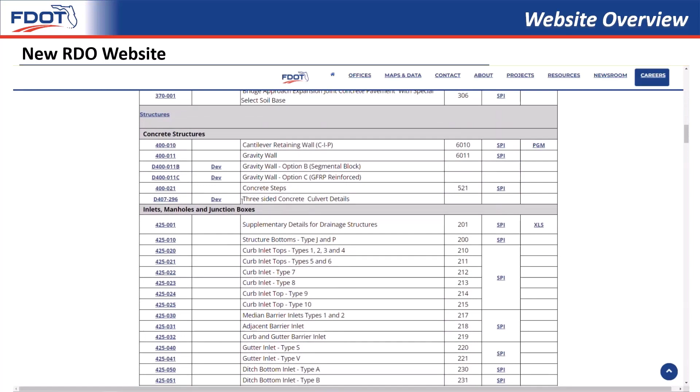Okay, here is our new book. We did not add any new indexes this cycle, but we did make a number of revisions. This page looks the same as previous years, so it should not be any different for experienced users.

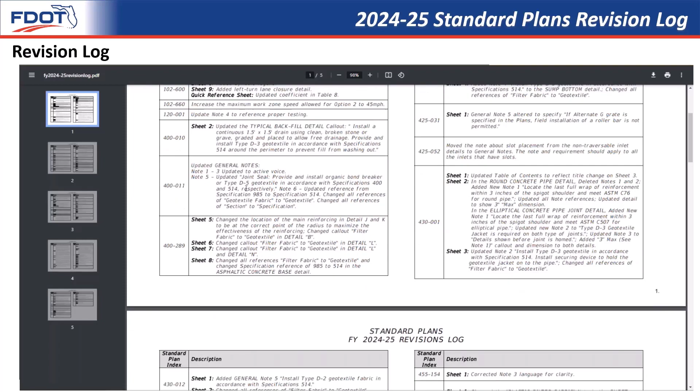Let's take a quick look at the revision log. This shows all the changes that were listed on the Track to Status page, but with a sheet-by-sheet description. To me, this is the best place to look and see if a revision was made to an index during the cycle.

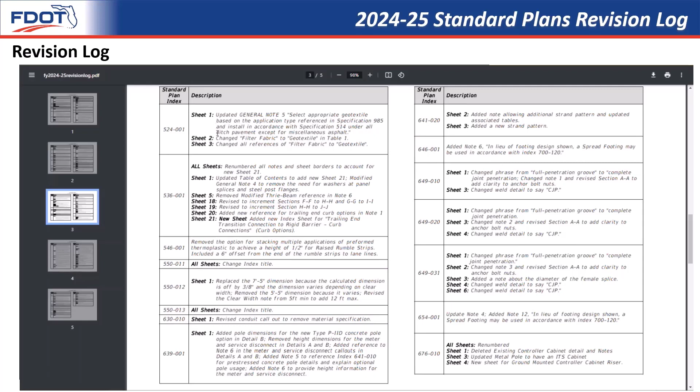My favorite revision to the website is the staff directory. We have a direct link here that takes you to a page with the standard plan section staff. I'd like to quickly go over our standard plan staff with you.

As I mentioned before, I am the state standard plans engineer. My former position is the standard plans publication engineer. That position is currently vacant and advertised on our website.

Richard Stepp is our senior standard plans engineer. Richard is a statewide expert on lighting issues. He also covers fencing and all of our roadside safety topics, including roadside barriers.

Richard has been a big help to me with working through a vacant standard plans publication engineer position and the additional work it requires.

James McGinnis is a standard plans engineer in our group. He is responsible for temporary traffic control and recently has taken over as our office's expert for roundabouts and other alternative intersections.

Shay Gibbs is the newest member to our group. Her title is Standard Plan Specialist, and she helps with the publication process, quality control for all of the revisions to the book, and is responsible for the development of our new submittal and review process. She has been a great addition to our group.

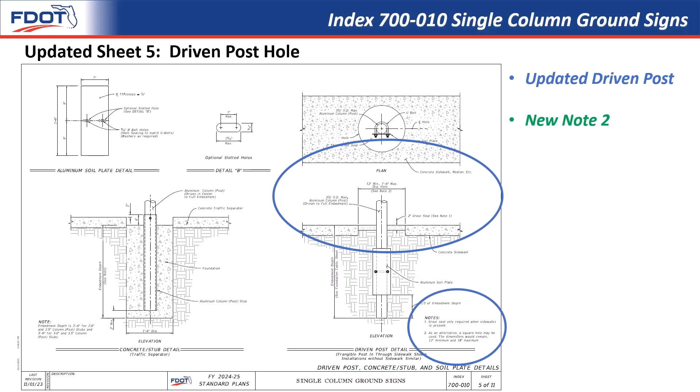This is something that the districts have requested me to add for a while now. There are times when the standard foundation shown in the indexes isn't practical because of limited space available. In those cases, the engineers were required to do a site-specific design to allow for a foundation that didn't impact the surroundings, for example, underground utilities.

So we worked with some of the districts, Josh Turley in our structures office, and staff at the Traffic Engineering Research Lab, or TERL, to come up with an option that we could add to the standard plans. This option should only be used when called for in the plans in cases of need.

One note I would like to make clear is that the base location can be shifted on the spread footing. We know that this location does need to vary to help avoid conflicts. The only limitation is it must be at least 1 3/8 inches from the edge of the footing.

Notes were added to the standard plan indexes 646-001, aluminum post and pedestal mounted pedestrian detector and signals, and to 654-001, rectangular rapid flashing beacon assembly, to allow for the use of this spread footing design in those applications.

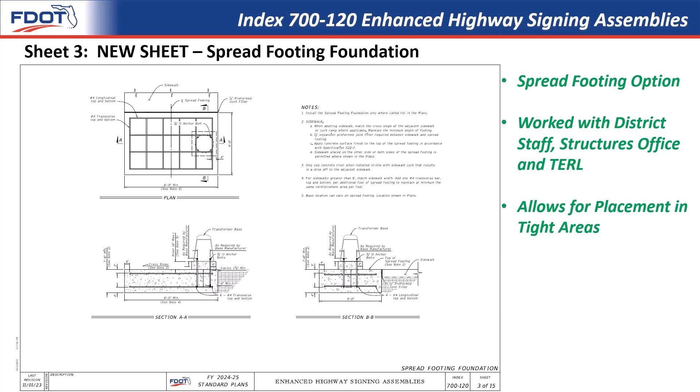Next, in the same index, I want to spotlight 3 new enhanced sign assemblies that were added. Durwood Shepherd has been working with other offices as part of the Railroad Safety Task Team to come up with ideas to help make railroad crossings safer. One item we came up with that is fairly simple is taking these 3 sign assemblies and enhancing them.

The first one, shown here on sheet 12 of 15 in Index 700-120, takes the railroad crossing warning sign and adds the flashing beacon to the top to make the sign more visible.

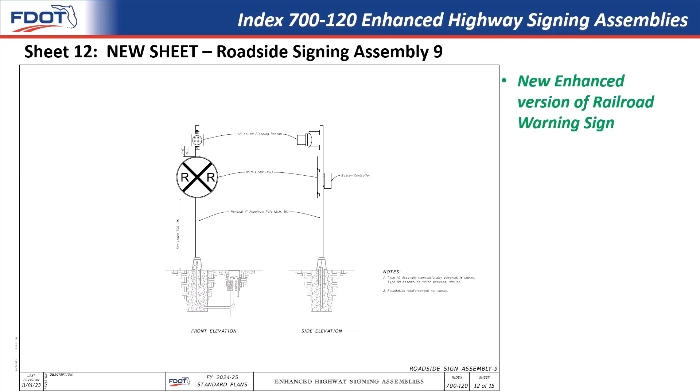Here on sheet 14 of Standard Plans Index 700-120, roadside sign assembly 11 is the last new enhanced assembly added this cycle. It is basically just the standard railroad crossing sign assembly with either a stop sign or yield sign depending on the crossing. But with this assembly, the stop or yield sign will be highlighted to make it more visible and hopefully help make approaching vehicles aware of the upcoming railroad crossing.

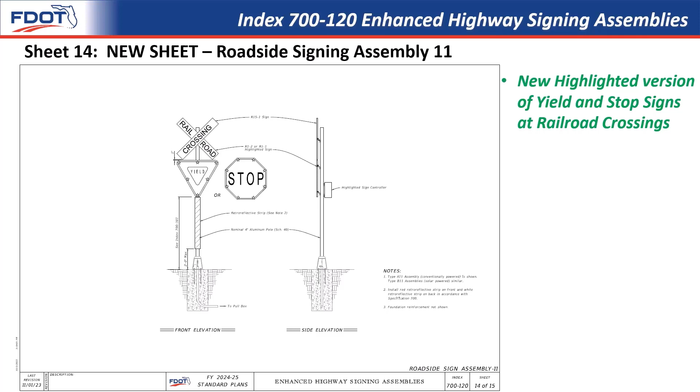After further coordination with the Traffic Engineering and Operations Office, the 18-inch white diagonal pavement markings along the mainline shoulder approaching the gore on entrance ramps are being deleted, as they are not shown or required in the AASHTO Green Book.

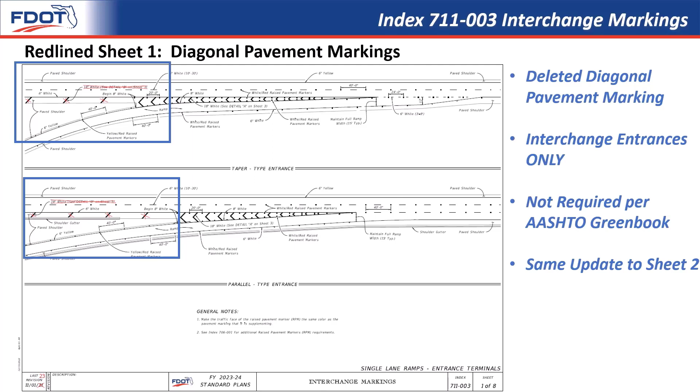Therefore, we deleted the 18-inch white diagonal pavement markings and label along the main line shoulder approaching the gore in both the taper type entrance and the parallel type entrance. We made this revision to all entrance details, including the details on sheet 2. They will remain on exit ramps. We are only deleting from the entrance ramps.

Here you can see the updated sheet 1 with the 18-inch diagonal pavement markings deleted.

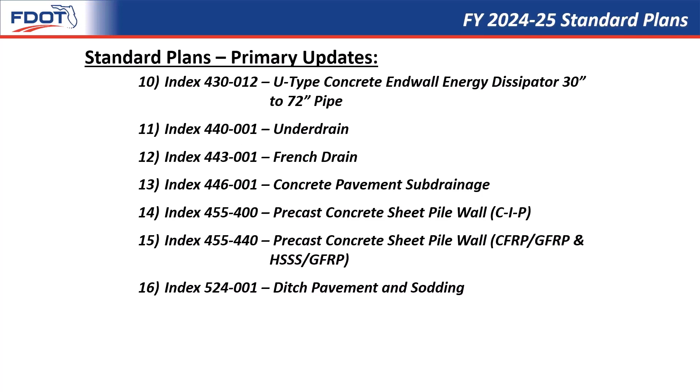In the July 2022 SSRBC workbook, construction requirements for the contractor for geosynthetic materials from Specification 985 were removed, due to construction requirements not belonging in Division 3 of the specifications, as that division is designated for producer requirements.

Instead of applying specific requirements to each individual specification that references 985 in Division 2, Specification 514 has been modified to cover geosynthetics used for drainage applications, construction requirements, and material acceptance.

Specification 514 does not cover reinforcement applications and erosion control, which has specific requirements in various areas of Division 2. It also ensures the contractor obtains geosynthetic product from a manufacturer that meets Specification 985 requirements. To be clear, Specification 514 essentially does reference Specification 985 to meet the materials requirement. However, Specification 985 covers manufacturer and producer requirements, and Specification 514 has now been modified to cover contractor requirements.

I will now show a selection of these indexes to give an idea of this update.

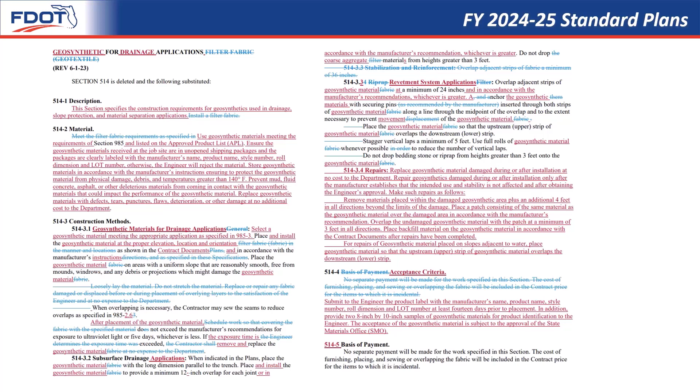This next one is similar. This is Index 425001, Sheet 3, which covers supplementary details for drainage structures. On this index, you can see we've updated a callout in the title to say geotextile instead of filter fabric. We've also added a note to clarify the type of geotextile.

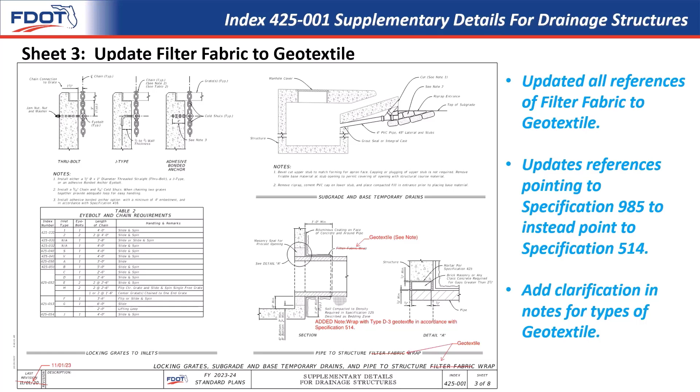Index 430012 now has a note on Sheet 1 to specify which geotextile to use, and references Specification 514 for the requirements.

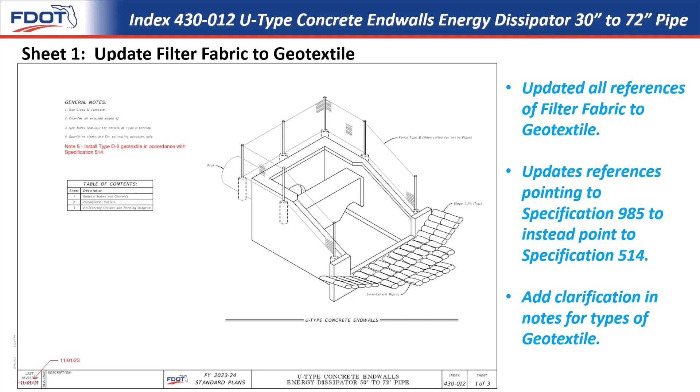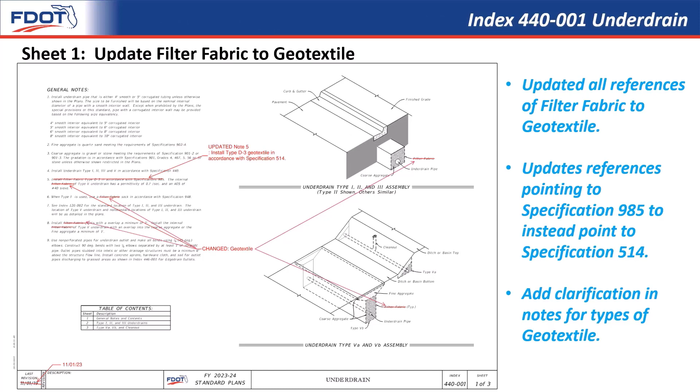My last example is Index 440001 for underdrain. Same as before, the notes and callouts have been updated to the new wording and specification.

The next updates are to Index 676010, Cabinet Installation Details, and 700-101, Typical Sections for Placement of Single and Multi-Column Signs.

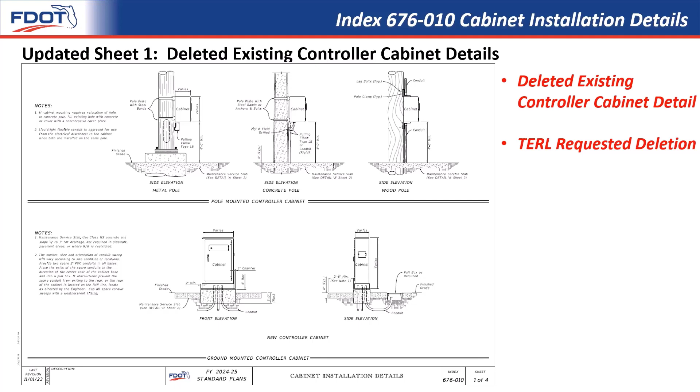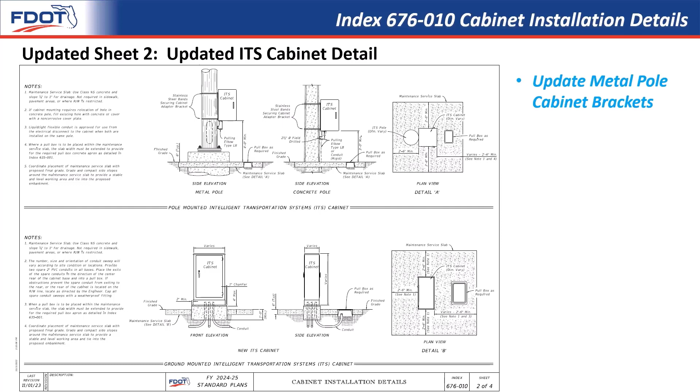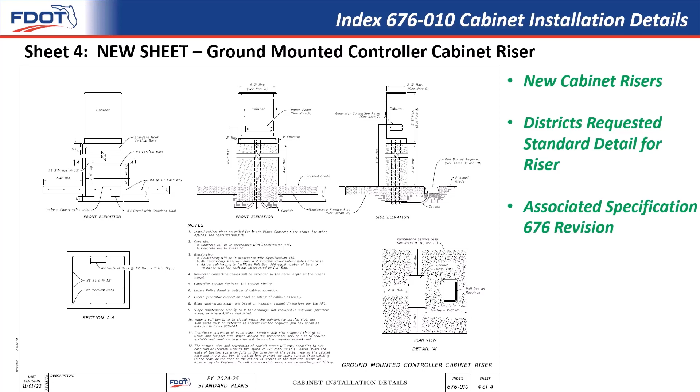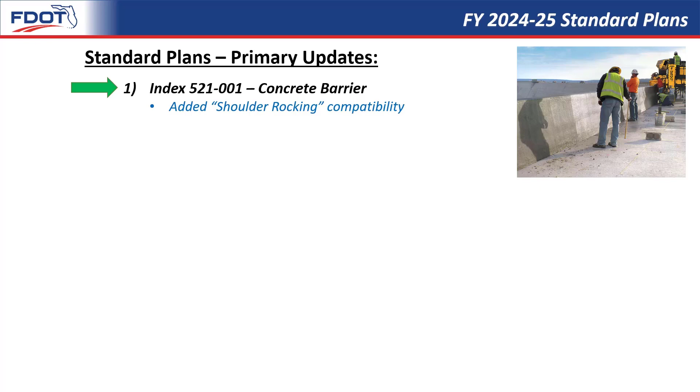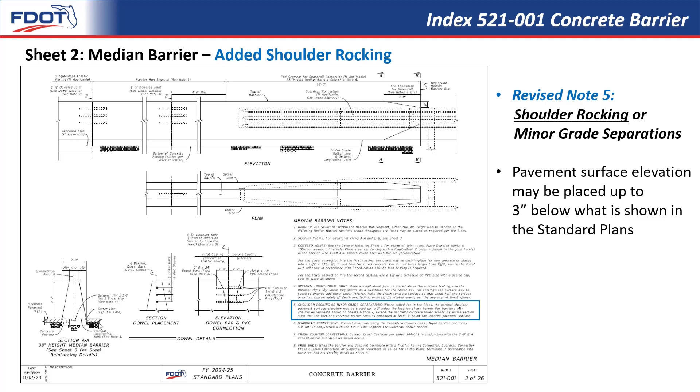You can see that the shoulder pavement's called out as this hatched area on both sides of the barrier, and the gutter line intersects the barrier at its bottom corner. That's basically the default setup from the standard.

And now this detail here is the blown up version of that, showing what's permitted when shoulder rocking is used. You can see that it's okay to lower this pavement up to 3 inches below the default gutter line.

In general, shoulder rocking is used as a last resort when the vertical profile of a roadway is very, very flat. So in order to get the water to drain longitudinally, the shoulder pavement basically will vary up and down every 100 feet, and the drainage inlets will be placed at the low points.

This new policy was recently added to FDM 211.4.2.1. If you go in there and follow the profile requirements called for, it basically leads to the result that the pavement gets lowered about 3 inches. Allowing for this 3 inches of lowering in our standard plans will accommodate that.

Additionally, for the plan's content requirement regarding shoulder rocking, you could look to FDM 915.3.5.1, with further details given in the standard plans instructions for 521-001 Part J. That just basically shows you how to place the callouts in your plan view along the gutter line of the barrier. If you were to start off by looking at the SPI for 521-001, that would get you going in the right direction.

Moving on, next up we have index 536-001 for guardrail, where here we've added a brand new sheet 21 for bridge trailing and transitions to rigid barrier. This now provides designers and contractors with some new curb options. In addition, we've revised the required washer usage, and we have some new exclusions.

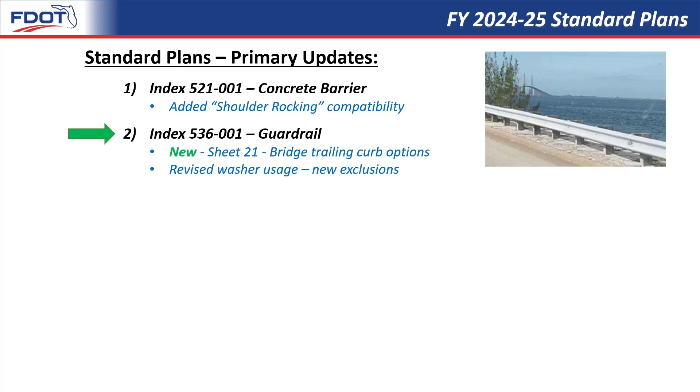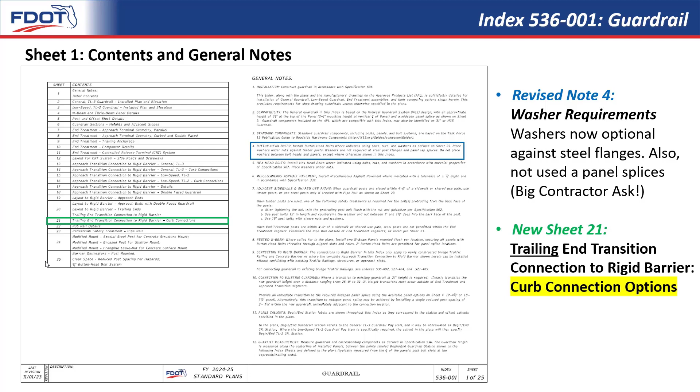Looking at the trailing end transition connection to a rigid barrier, typically a bridge, we previously only showed a very basic guardrail connection with no curb connection at the ground level. The curb connection isn't required for crash worthiness the way it is on the approach end. That said, several designers requested curb drawings for water conveyance and compatibility with curved roads, so we created a brand new sheet 21 and added this reference into note 1 shown below.

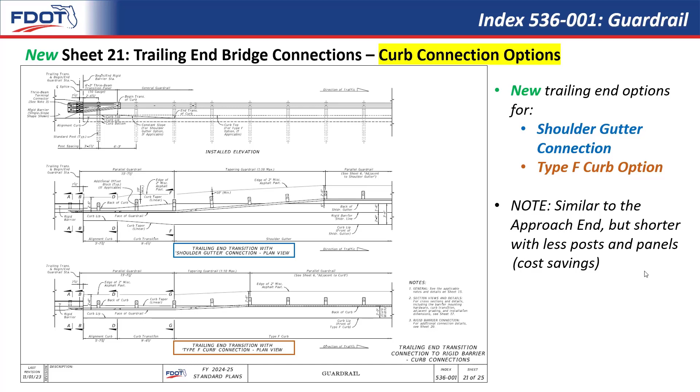As an example, to help explain these plan views, we'll look at the shoulder gutter. Here we've got the elevation on top, and we'll focus on the plan view on the bottom, specific to the shoulder gutter. In the blue rectangle, we've got the parallel guardrail section, where the face of guardrail aligns with the rigid barrier. By parallel, we mean it follows the edge line of the traffic lane. That parallel section includes the alignment curb, and the section views for that are on sheet 17, just like the approach.

This also includes the curb transition, shown on sheet 17 between sections DD and FF. Coming off the bridge, by section FF, the shoulder gutter shape is basically established. With that shoulder gutter established, we then have the tapering guardrail, transitioning out at 1 to 10, with the goal to get to the next parallel guardrail section, fully detailed on the right. At this point, you just have your guardrail typical section for shoulder gutter, defined on sheet 6 of the standard plans.

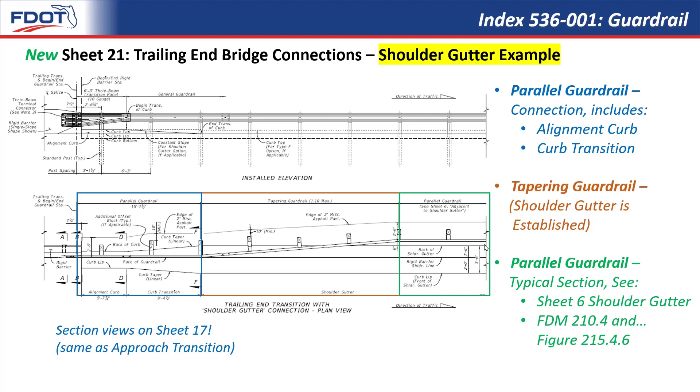It's also shown in FDM 210.4 and figure 215.4.6. This aligns with the shoulder gutter shape shown in the standard plans, where the rigid barrier shoulder line travels parallel to the road the entire way and lines up with the gutter. You project that out, following the edge line of the roadway. You then have 2 feet to the curb lip, the front of the shoulder gutter, and 1'6" to the back of the shoulder gutter. The face of the guardrail is then 6 inches behind that. That's your typical section that can continue for miles or however long you need it.

So now, given this new tool, what are the needs from the roadway designer? What needs to go in the roadway plan view? As shown in the blue rectangle, you call out the trailing end transition station so it aligns with the standard plans. The pay item for this is currently 536-8-113, called trailing transition, and per the specifications, it includes that alignment curb.

You then use your guardrail line and draw the guardrail coming off of this concrete barrier. You place that guardrail line at the face of the guardrail, emulating what's shown in the standard plans. We've got the dimension for the parallel guardrail, then you taper the guardrail at 1 to 10, roughly 4 post spacings. Then you've got your guardrail typical section established, corresponding to this parallel guardrail section. Last, you call out the shoulder gutter limits, and you can tabulate that with its own pay item.

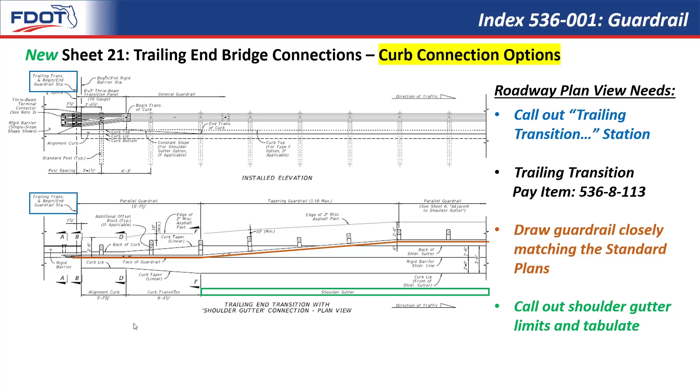I'll also remind you this is just the shoulder gutter version. The Type F curb version is very similar, even a little simpler with a shorter taper, and you handle it in the same way. So the hope here is now on the trailing end, you require even less detail in the plans, and hopefully this helps moving forward.

And with that, we can shift gears and move forward to Index 639-001 for the electrical service point details. Here we've added a new taller concrete service pole option and also fine-tuned some other things.

Taking a look at Sheet 1, Detail B for the underground feed, we can see this new 16-foot service pole option. This was requested by District 6 down in Miami-Dade County, and that 16-foot pre-stressed concrete pole was recently added to Index 641-010, Sheet 5.

The options to differentiate the poles are shown here. We've got Type P2A, the 12-foot version, and Type P2D, the new 16-foot version, with corresponding above and below ground dimensions given. We also added cross-reference linkage between this index number and the pre-stressed concrete pole standard it uses, Index 641-010, shown in Note 5.

Next, we removed some vertical dimensions from this detail to give more leeway and freedom for the districts, and added Note 6 to explain these device heights. This basically explains that the meter and service pole disconnect heights are defined by the EOR in the plans or by the power company.

This typically follows the NEC National Electrical Code, but you can see the minimum height of those devices is 4 feet. Beyond that, the electrical engineer working with the power company can define these other heights. Particularly for the new 16-foot pole, the engineer may choose to make these two devices higher.

Last, more leeway is provided so the meter can be placed below the service disconnect if needed. That's our last change. It applies to both Detail A for aerial feed and Detail B for underground feed, and Note 6 is referenced for both of these devices.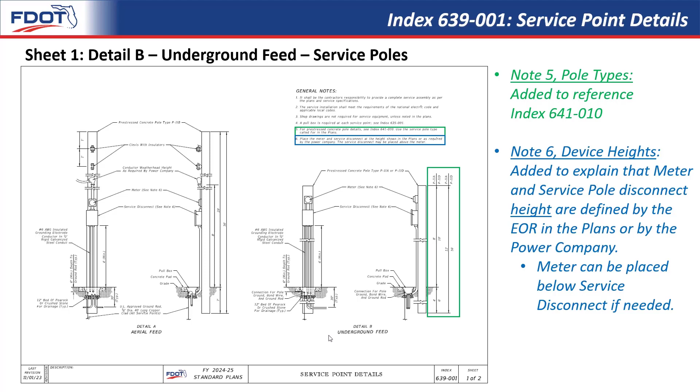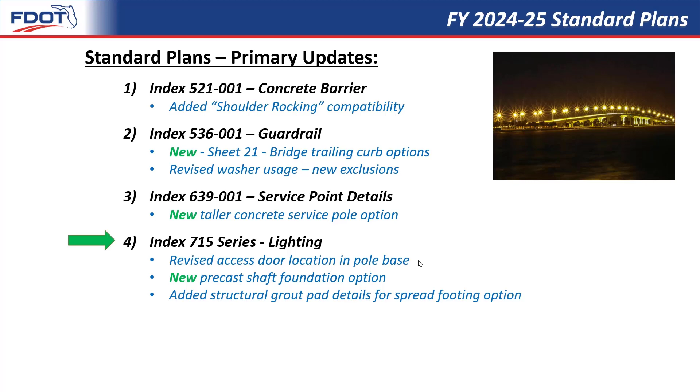And so with that, we've wrapped up the service point details. We can now move on to the Index 715 series for lighting. We've revised the access door location in the pole base, added a new precast shaft foundation option, and added some structural grout pad details for the spread footing option.

Here we'll take a look at Index 715-001 for conventional lighting. On Sheet 1, we've updated the access door orientation. First, we removed the access door detail from the metal pole wiring detail down here.

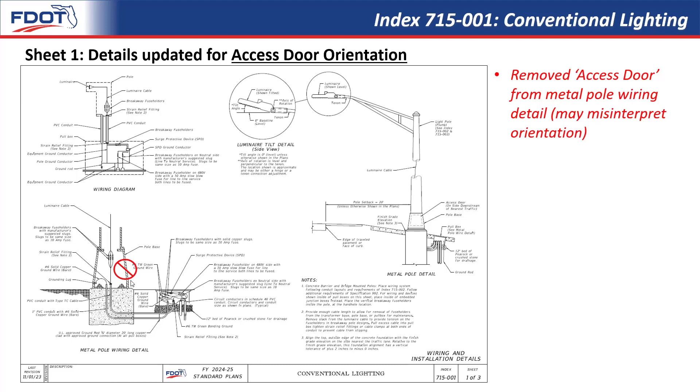The issue is this detail didn't establish a clear orientation, so some might have misinterpreted that location. With that detail removed, we went ahead and labeled the pole base, which references the pole base callout in the metal pole detail. Now the metal pole detail has the orientation clearly established.

We can see the light pole arm here, which faces the roadway. So now when we draw on the access door, we know that it's oriented perpendicular to this arm. The goal is that the access door is now located on the side downstream nearest the traffic. That's the requirement, and with the orientation clearly established, this matches the standard specifications 715-3.

The reason the access door is located on the trailing end relative to traffic is so workers can keep an eye on oncoming traffic when working inside the access door. This helps give workers a little extra heads up in case there's an errant vehicle departing the roadway, so they may have some time to get out of the way.

Now moving on to Index 715-002 for standard aluminum lighting, we're taking a look at Sheet 4 foundation details where a new option has been added. Note 3, shown in the green rectangle, is brand new.

It's basically a new option for precast foundations, which allows for these foundations to be cast a little more easily in the shop. This was requested by the fabricator and it helps them out.

Quoting directly from Note 3: for precast foundations, the circular cross-section shown here may be substituted with an octagon shape. Here's the circular cross-section shown in view BB. Instead of that circle, they can use an octagon so they have some flat surfaces in their forms. Continuing the quote, the out-to-out distance between parallel edges of the octagon must be greater than or equal to 2 foot 6 inches.

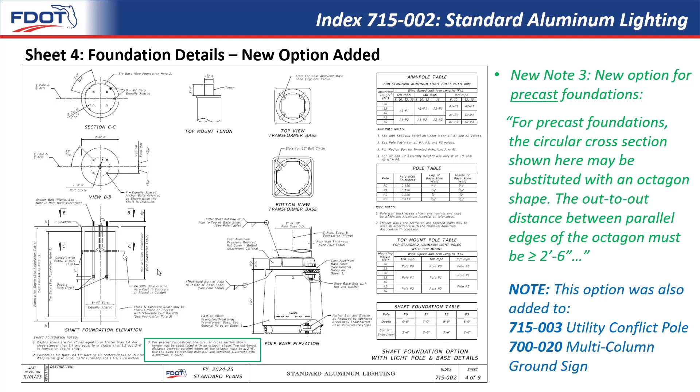Okay, so now taking a look at our last topic in the standard aluminum lighting standard, we'll look at Sheet 5 for the spread footing foundation option. The spread footing in general is a recent add, and so we got some feedback on this regarding constructability and adding some more details to help.

This new structural grout pad shown here in green does assist with that constructability by allowing for leveling the area directly beneath the pole. Basically, in a lot of cases, the spread footing foundation is designed to emulate the sidewalk with the same cross slope, and so the cast surface of the top of it may not be perfectly level. The simplest method is to cast this foundation essentially even, matching that concrete cross slope all the way across, and that really helps to avoid any surface irregularities.

And then from there, they go ahead and place the structural grout pad and make sure that thing is nice and level. This new detail basically supplements the specification 715-3.1 process that was already in place, and it already provided grout as an option for leveling that surface. That said, placing it in the drawing certainly does help to guide the contractor, so this should be helpful. And one last thing, that grout material is defined in specification 934. All of these things are mentioned in note 9 here down below.

And then next, just mentioning a minor change to note number 7. We are continually investigating costs and how to improve practicality, and so we've revised the sizes of washers required to anchor the pole. We're just making sure that these large washers that are called for are readily available in the industry.

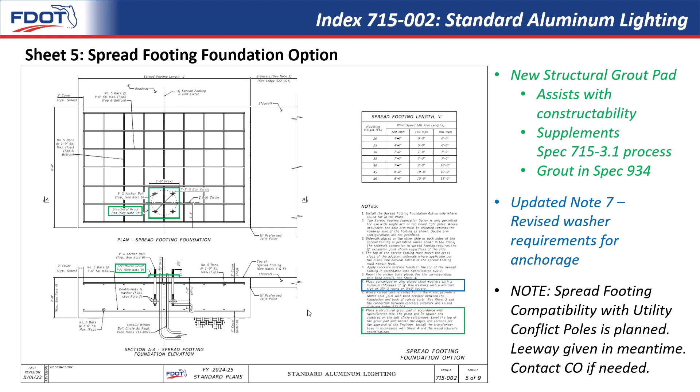Okay, so as we close out our revisions to the concrete barrier and lighting standards, this seemed a good opportunity to make a training announcement. Working with us here at FDOT, the Florida LTAP Center is hard at work producing some major trainings for some of the larger items in roadway design.

So the first of these is FDOT roadside barrier design. As you can see by the title, it's not a national training, it's focused on the way we do things here at FDOT. This training is estimated to be 12 hours long, broken up into several modules, and it really will be the most organized and comprehensive training ever developed for FDOT on this topic.

So the training will start off with FDM 215, roadside safety, and it will cover the usage needs, length of need, and general requirements, among other things. It will then go over the details and requirements for the standard plans for guardrail, concrete barrier, pier protection barrier, and even the connecting crash cushions.

The next major training in development by the Florida LTAP Center is the FDOT Basic Lighting Design Training. This training is estimated to be 9 hours, broken up into several modules, and it's expected to be the most organized and thorough ever produced for FDOT on this topic.

The training will start off by covering FDM 231 for lighting, including usage needs, warranting, photometric design, voltage drop design, and the lighting design analysis report contents, among other things. The training will also cover the standard Plan 715 series, including conventional lighting and high mast lighting.

Both trainings are in development, so no course dates have been announced. That said, both are expected for the first half of 2024. These are expected to be given as live interactive trainings one time, and then the recording of those trainings will be posted on the Florida LTAP website for anyone to view at any time.

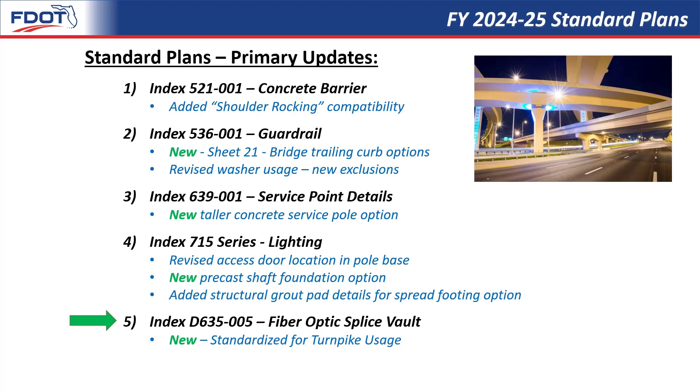Last but not least, we'll take a look at our brand new developmental standard plans, D635-005, for our fiber optic splice vault. This whole standard was created to support the Florida Turnpike Enterprise and their fiber optic network, although it certainly may be used elsewhere.

These vaults are typically placed in medians to facilitate fiber optic access points and connections. Standardization of this option removes the need for project-specific structural designs and shop drawings, which should save a lot of time and effort moving forward.

In order to create this standard for the Florida Turnpike Enterprise, we had reviewed project-specific design packages that were pretty lengthy. So the idea is by developing these clear details and notes to specifically explain what's needed, we should be able to avoid a lot of that work going forward.

Something worth mentioning is the Structures Design Office specifically took a look at the concrete and steel reinforcing design of this structure and designed it for the H20 loading, which is a substantial size truck, so we can be confident that whatever large moving equipment is used on the roadsides can be accommodated with this design.

One other interesting enhancement is that this new design now uses the Type 3 manhole frame per Index 425-001, so this consistency of standard designs and matching what's currently used on many roadways should help to bring costs down.

That said, the manhole cover is basically the same as the one used in 425-001, except it's not a two-piece cover, it's just a single-piece cover, so the material is continuous without any joints. That added weight requiring lifting should add a little bit of extra security for that fiber optic system.

Looking ahead, the plan is to publish this standard with the regular standard plans for the following standard plans ebook cycle. But for now, we wanted to give this a trial run as a developmental standard because that makes things a little bit easier to modify on our end. We're following feedback on constructability closely, and we can make updates as needed.

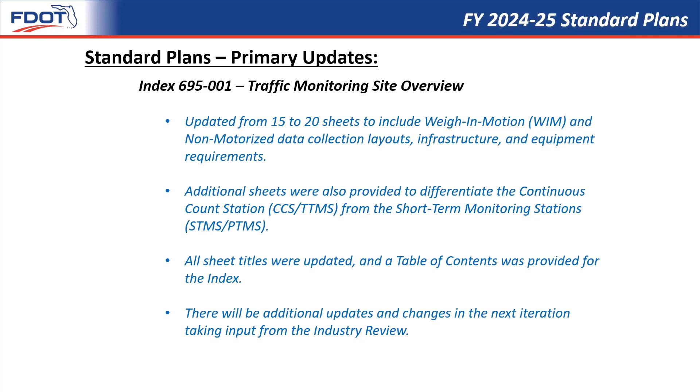Sheet 1's illustration was updated to show the required modem antenna, managed field Ethernet switch, and patch panel. Details were moved to sheet 18 and replaced by the table of contents. Corrections were also made to the notes section. Note 1D was corrected for an error with the P1 receptacles identification. Note 5 was amended to be consistent with the other sheets. Notes 4 and 6 were modified, removing the statement of furnished separately for required equipment. Here's the new sheet 1.

Sheet 2's amendment was to add the required modem antenna, managed field Ethernet switch, and patch panel to the illustration. Changed from vehicle terminal strip to a more accurate piezo sensor terminal strip. Correction to the notes: 1D properly labels the P1 equipment cable. Notes 4 and 6 remove the furnished separately notation for required equipment. Note 5 was amended to be consistent with the other sheets. Here is the amended sheet 2.

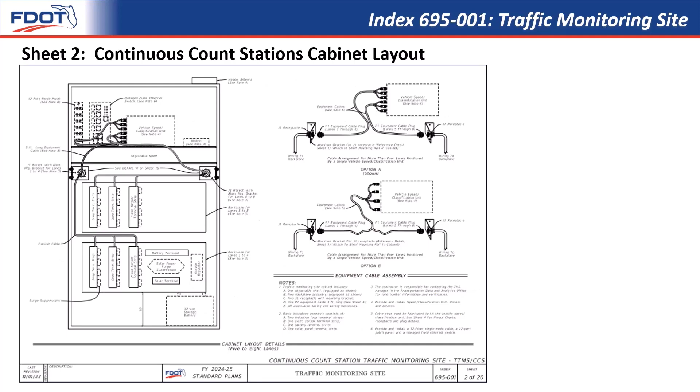Sheet 3's illustration was modified to spell out the center conductor notation. Here's the modified sheet 3.

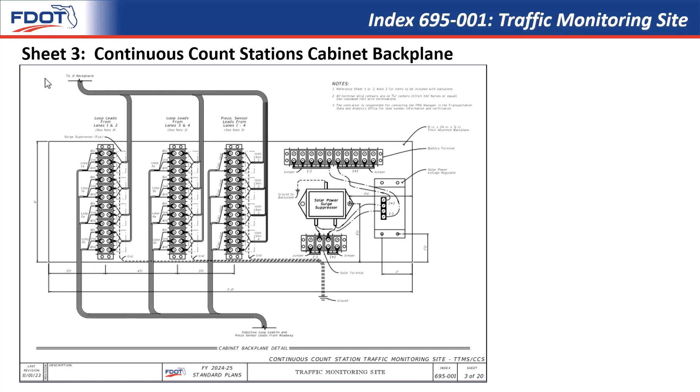Sheet 4 was updated to correct the second table, the P1 equipment cable plug pinout, that was previously incorrectly labeled as J1. The modified sheet 4.

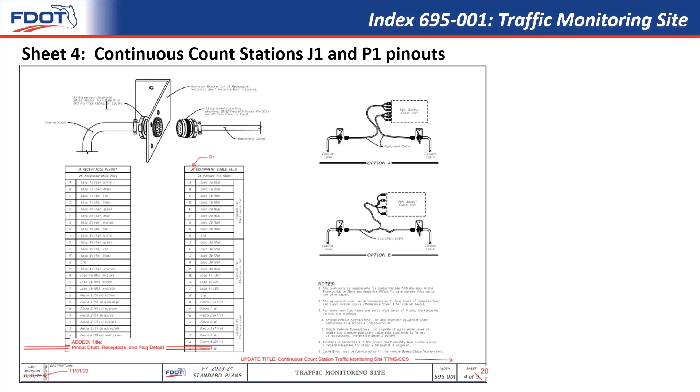Sheet 5 was updated to show in both layouts both lanes of travel flow. It specifies a non-weight axle sensor for the configuration. It moves the curb and gutter detail to page 18. It updates Note 3 for the removal of splicing the loops from the document. Loops must now run the entire distance to the cabinet. Note 6 was also deleted. Here's the modified sheet 5.

Sheet 6 is a new sheet for the short-term traffic monitoring layout, 4 or less lanes. No modem or antenna will be required for this setup. Here is the new sheet 6.

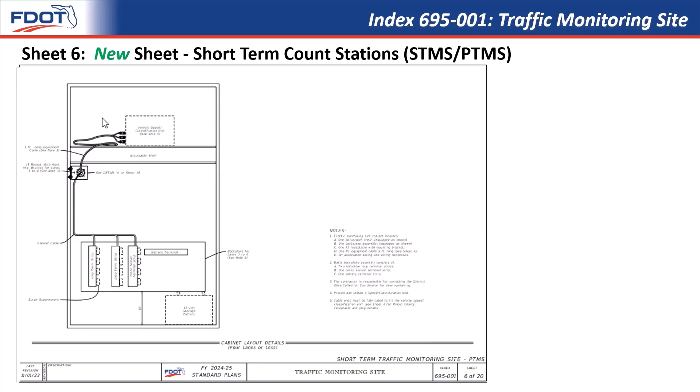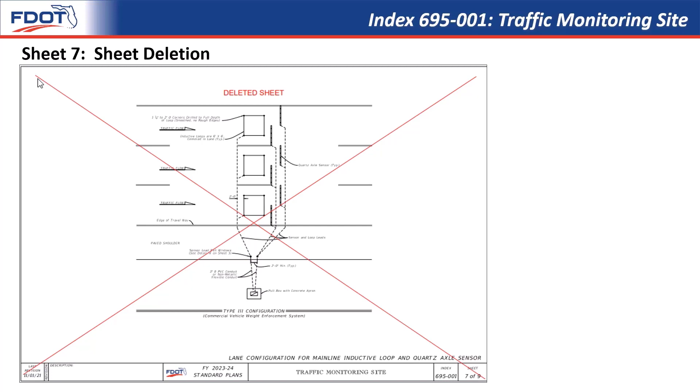Sheet 7 was deleted from the 695-001 as FDOT TDA is moving closer to the long-term pavement performance, LTPP, standard for weigh-in-motion sites. The new sheet 7 is to illustrate the short-term traffic monitoring site layouts for 5 to 8 lanes, omitting the need for the managed field Ethernet switch, modem, antenna, and patch panel.

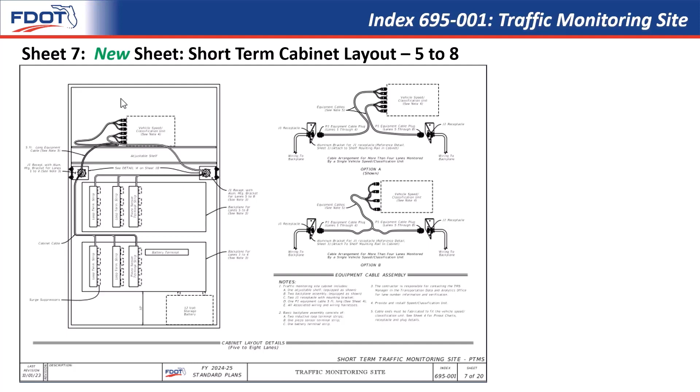Sheet 8 is a new sheet to illustrate the lane layout of the short-term data collection locations, up to 4 lanes. Here is the new sheet 8.

Sheet 9 is a new sheet dedicated to the weigh-in-motion monitoring site cabinet layout. Sheet 9's illustration includes modem antenna, managed field Ethernet switch, and patch panel.

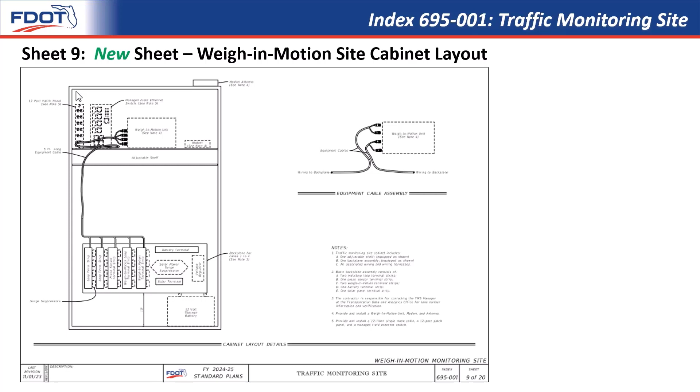Sheet 10 is a new sheet for the weigh-in-motion cabinet backplane details. The new sheet 10 illustrates the weigh-in-motion backplane details. It includes inductive loop terminals, non-weight and weight sensor terminals, along with solar power suppression and regulator.

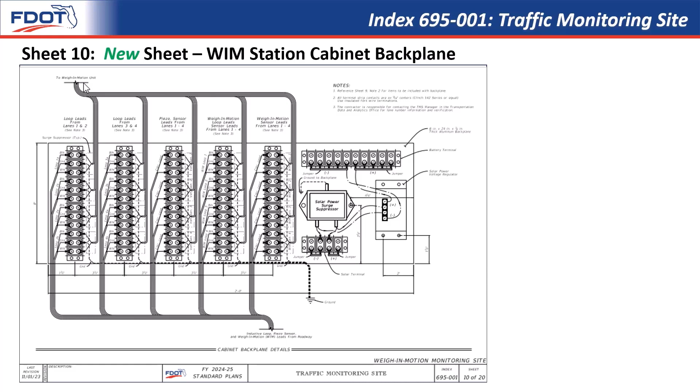Sheet 11 was modified to remove the Type 1 Configuration A from the sheet. FDOT TDA is moving toward the long-term pavement performance setup with right and left wheel path data being collected. Sensor spacing on the illustration was also corrected from 24 to 12 feet.

The new sheet 11 shows the FDOT lane layout for a weigh-in-motion lane. Weight-gathering sensors are in both wheel paths with an inductive loop center. The sensor spacing was also corrected on this sheet.

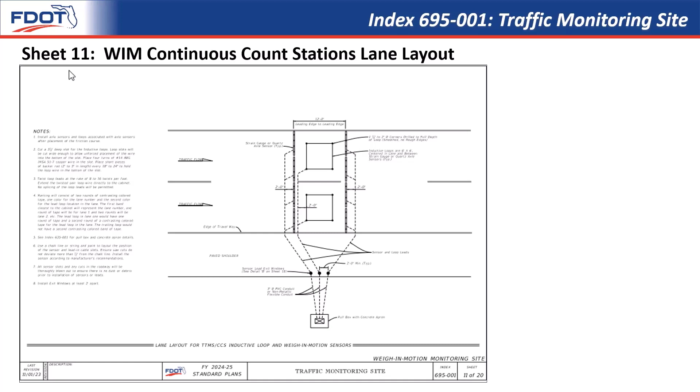Sheet 12 is a new sheet for the non-motorized monitoring site cabinet layout. As applications may vary, the information must be verified with the Transportation Data and Analytics Office. In Sheet 12, an illustration of the non-motorized cabinet layout is found, including a modem with antenna, counter, battery, and backplanes.

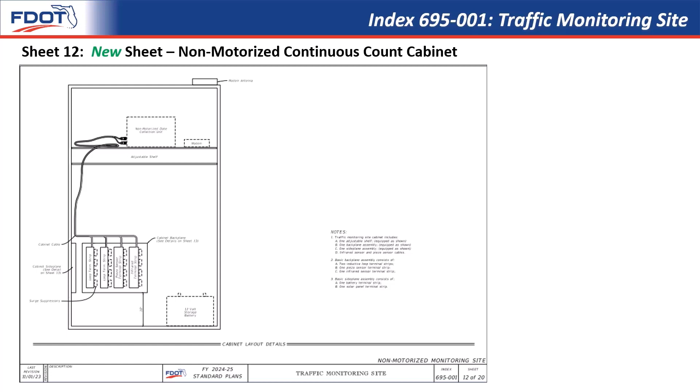Sheet 13 is a new sheet for the non-motorized monitoring site cabinet side and backplanes. As applications may vary, Sheet 13 is dedicated to illustrating the non-motorized cabinet side plane for power, and back plane for sensors, in a typical setup.

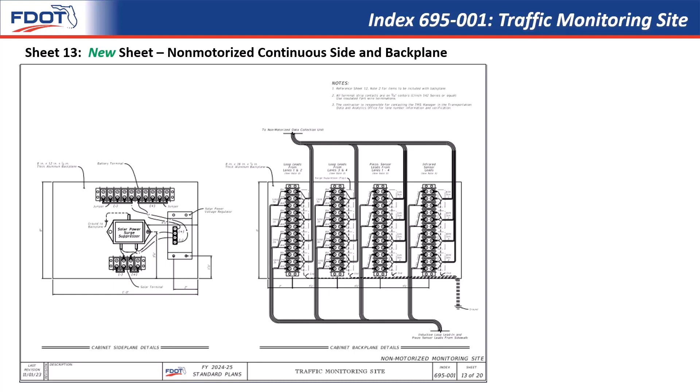Sheet 14 is a new sheet for the non-motorized narrow path sensor configuration. The new Sheet 14 illustrates the use of non-motorized data collector and sensor installation for a narrow side path configuration. The first is used with an infrared sensor, and the second is without the infrared sensor. Both setups provide directional data.

Sheet 15 is a new sheet for the non-motorized large shared use path configuration. The new Sheet 15 illustrates the layout of the non-motorized data collection in a large shared use path configuration, the first with and the second without infrared sensors, both capturing directional data.

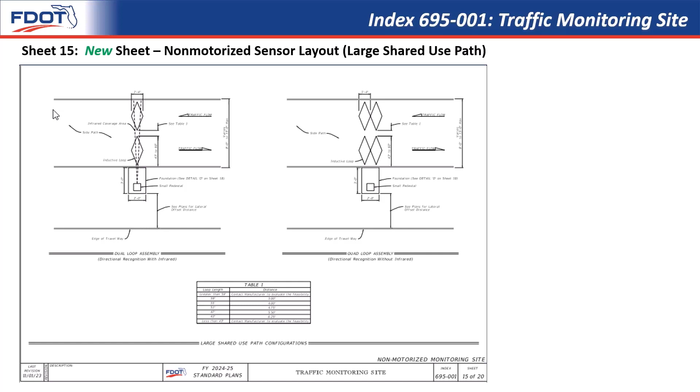The new Sheet 16 illustrates the non-motorized extra large shared use path configuration. The sheet illustrates the layout of the data collector and sensors with and without infrared in an extra large shared use path scenario. The first illustration has the infrared sensor and the second is without the infrared sensor, but both capturing directional data.

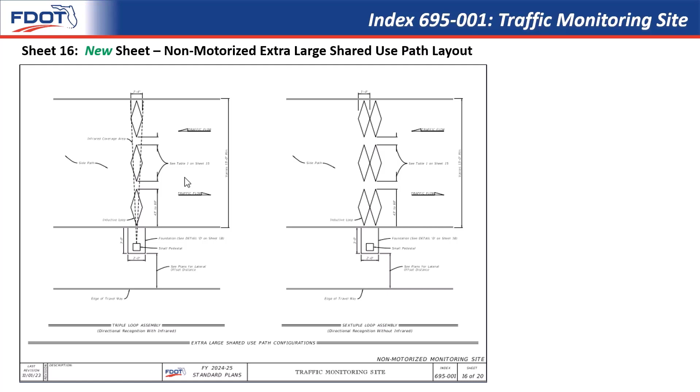The new Sheet 17 is for the non-motorized paved sidewalk configuration. The new Sheet 17 is to illustrate the layout for the non-motorized data collector and sensors without infrared in a paved sidewalk scenario.

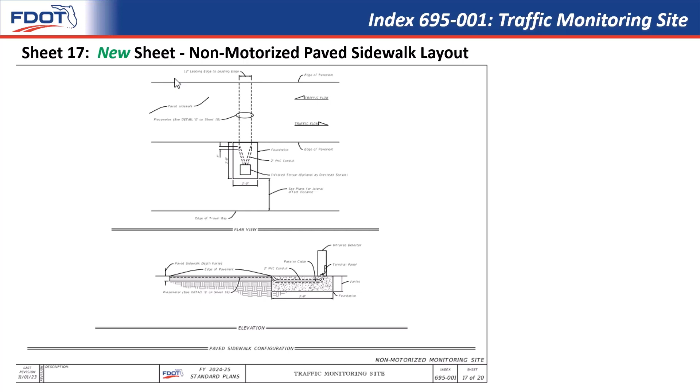Sheet 19 was modified for the non-intrusive vehicle sensor layout to include the maintenance pad and a pull box for ground rods. Here's the new Sheet 19 with the maintenance pad and ground rod pull box.

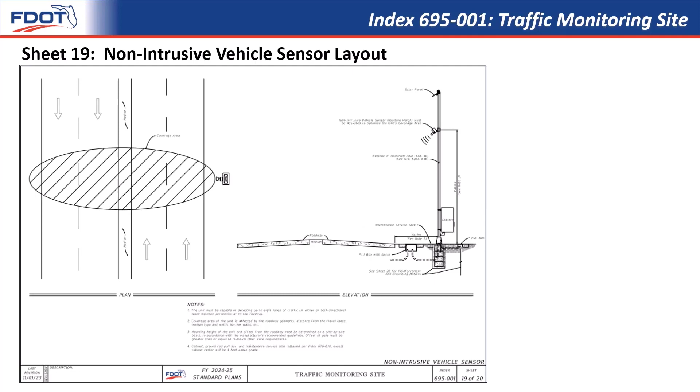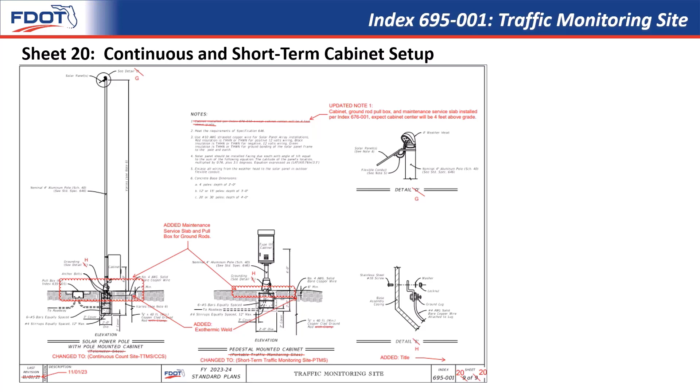Sheet 20 was modified to include a maintenance pad and a pull box for the ground rods, for both continuous and short-term traffic monitoring sites. Note 1 was modified to provide index number for the cabinet, ground rod, and maintenance slab. Labels were updated and sheet titles were amended. Here's the new Sheet 20.

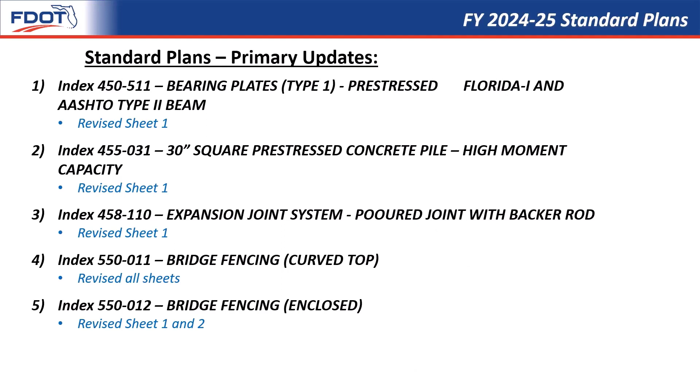Here is a brief overview of some of the standards we'll be addressing today. We will conclude our presentation with Index 64120, the concrete CCTV pole.

To kick things off, we will start with Index 450-511, bearing plates, Type 1 pre-stressed Florida I-beam and AASHTO Type 2 beams. For this, we did two things: we modified the dimension L for the skew angle, and we also added a note to clarify what the negative dimension means there.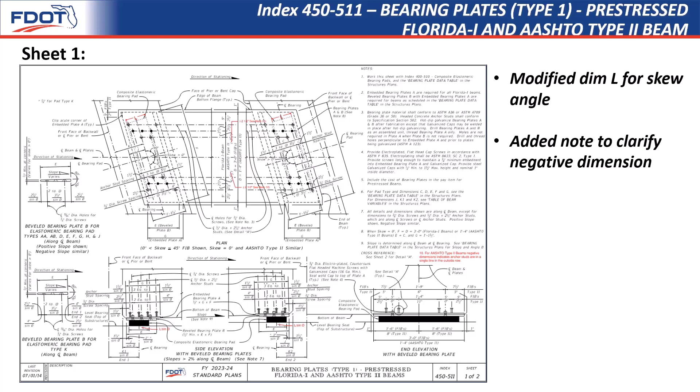On the left, you can see the dimension of the bearing pad, the width of the bearing pad L, here in red. In the section cut, which is parallel to the beam, cutting across this way, the dimension L, as shown in the image on the right, is not quite right because dimension L is not parallel with the beam—there's a skew. So what we had to do is add the sine theta to account for the skew there, and we corrected that.

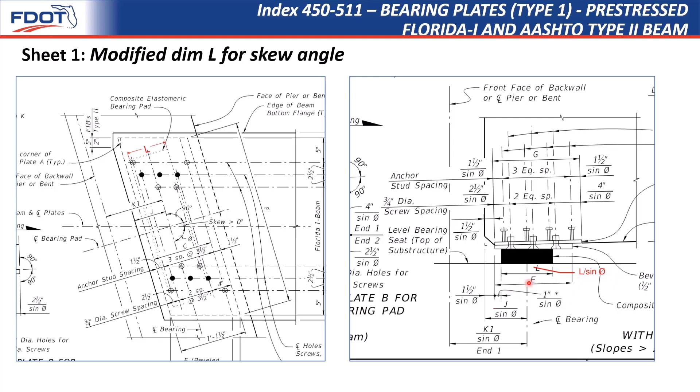For the second part of the changes to the standard, in the image to the left you'll see the negative 2.5 inch dimension for type 2 beams. We've added C note 10, which says for AASHTO type 2 beams, negative dimensions indicate anchor studs are in a single line in the outside row. Normally these anchor studs are 2.5 inches beyond the countersunk screws interior to the beam, but a negative dimension means go the other direction and put these in one row in the outer row of the beam. This is because type 2 beams have such a small width that we can't fit multiple rows like we can for other beams. So we added note 10 to clarify what that negative dimension means, since you don't typically see a lot of negative dimensions in the standards.

For Index 455-031, 30-inch square pre-stressed concrete pile with high moment capacity, we've done two things. We've altered the splice detail here, and we've removed the option for corrugated galvanized steel pipe for forming the void, because we wanted to reduce the risk of corrosion and possible reduction in the lifespan of the pile.

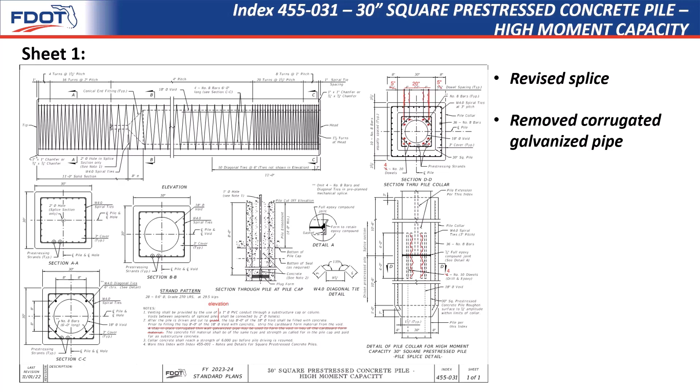Looking closer at the splice, we moved the dowels more interior, so these dowels here we shifted them more interior. We did this to help prevent spalling into the void while drilling. This did reduce the number of dowels, but that's okay since most of the moment capacity comes from the collar reinforcing, which is the 36 number 8 bars on the perimeter.

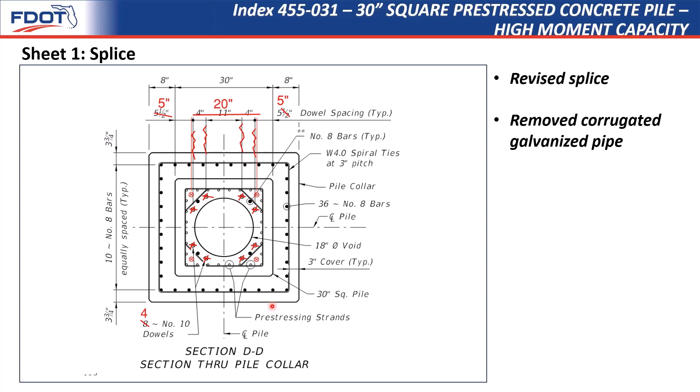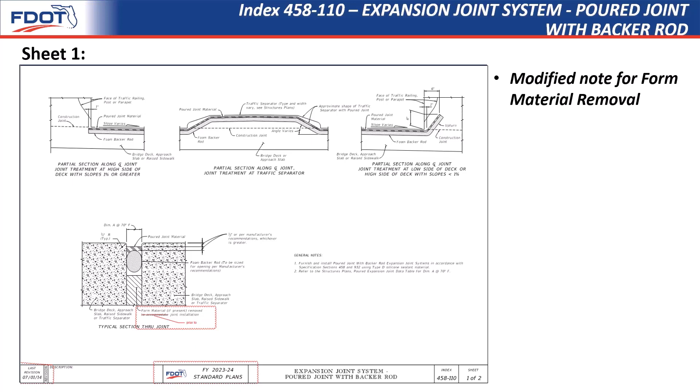For Index 458-110, expansion joint system, poured joint with a backer rod, we made a modification to the joint detail here about the removal of the form material. The reason for this is that over time, as the poured joint may fail, small incompressibles such as rock and sand can become trapped in the joint if the form material is left in place. During thermal expansion and contraction, this can cause spalling in the bridge deck.

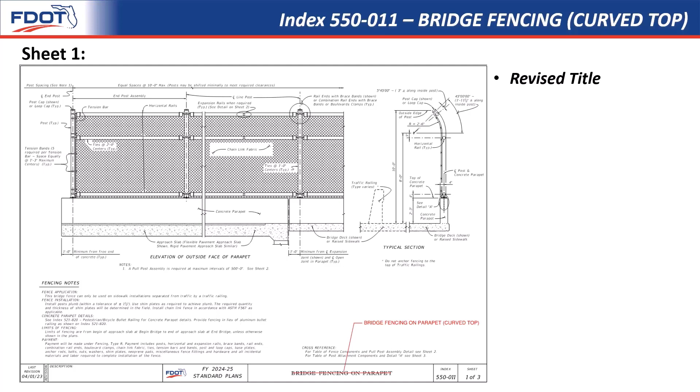For Index 550-011, bridge fencing on parapet, we changed the title of the index. We actually did this not because of this particular standard, but because of 550-013, which was called bridge fencing over railroad. We got requests to use 550-013 in places not over a railroad, and though it was created to comply with railroad requirements, there was no prohibition on using it elsewhere. So we decided to change the title to more accurately reflect its usage. The defining characteristic of this index was that it was on a parapet, so the new title is Bridge Fencing on Parapet Curved Top.

For Index 550-012, Bridge Fencing Enclosed, we got some questions about how big the enclosure could be, what's the max dimension the standard is designed for. So we added a maximum width to this. In addition, it was brought to our attention that some of the dimensional math was a little bit off, so we adjusted it.

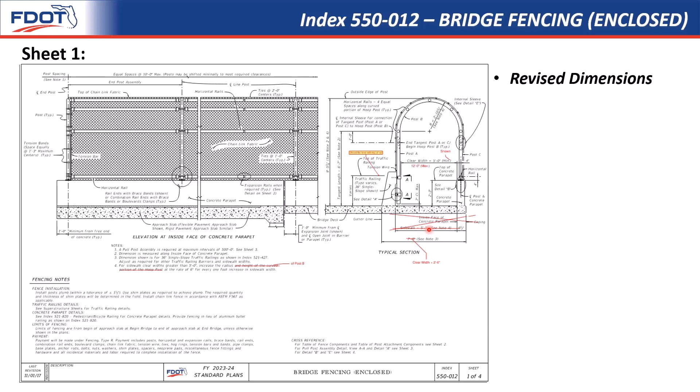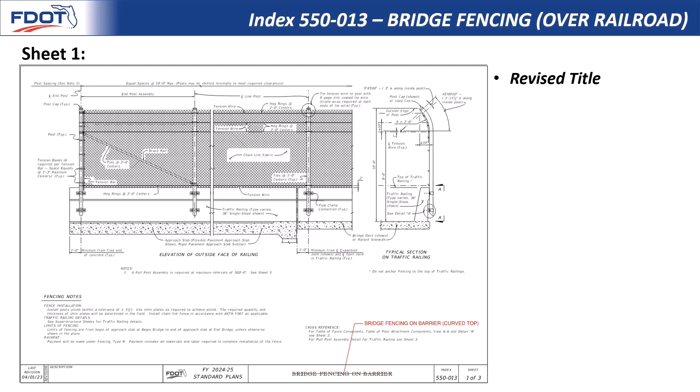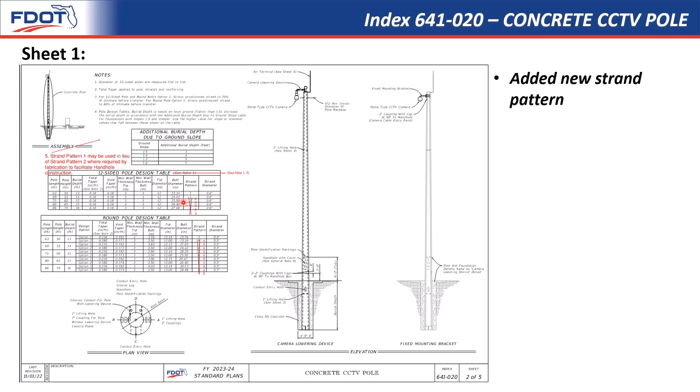Wrapping up with Index 641-020, the concrete CCTV poles, we added a new strand pattern to help facilitate construction of the handhole. On sheet 1, we had to modify the tables for the updated additional strand pattern. On sheet 2, you can see we've added a new strand pattern, which shifts the strand so there's clearance for the handhole to be formed on the flat of the cross section while still maintaining all appropriate cover requirements. All these strand patterns were just bumped up one: 1 became 2, 2 became 3, etc.